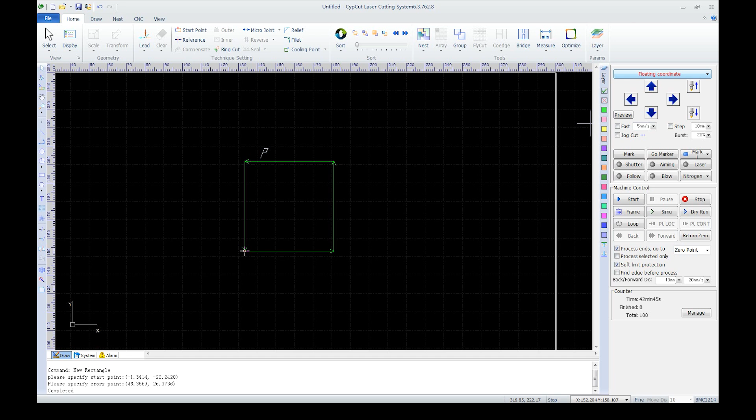Here is Friendess's CYPCUT tutorial. So far we've learned about features in view, geometry, technique setting, which enable us to quickly draw graphics and set basic techniques. Sort, group, fly cut, and co-edge help us to simplify cutting paths to be efficient. Today we're gonna learn a few more features of layers, task, and find edge, as well as how to use the machine control panel.

Let's start with the machine control panel. First of all, we need to figure out the difference between floating coordinate and workpiece coordinate. Machine coordinate is a fixed system. To facilitate flexible cutting tasks, CYPCUT applies floating coordinate and workpiece coordinate. Direction definition in different coordinate systems is the same. The only difference is 0-point position. The white box is the machine bed, and the red cross is the laser head.

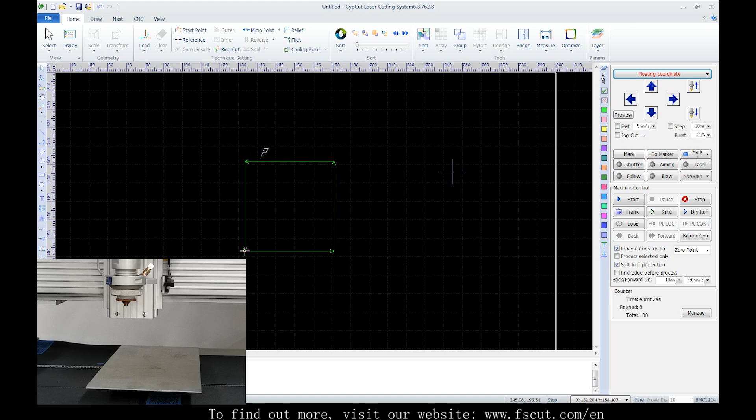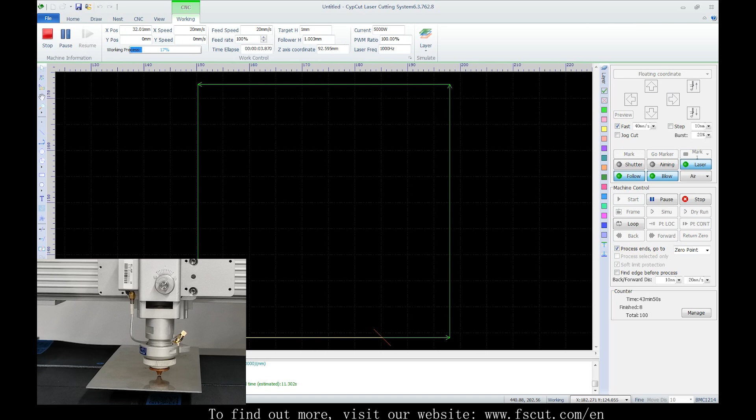On the floating coordinate, the laser starts cutting from where it stands. 0-point is the current position of the laser head. Take this position. We can start right from the point. And if we move to another position, it will start right from it. Floating coordinate is usually used in small batch cutting tasks.

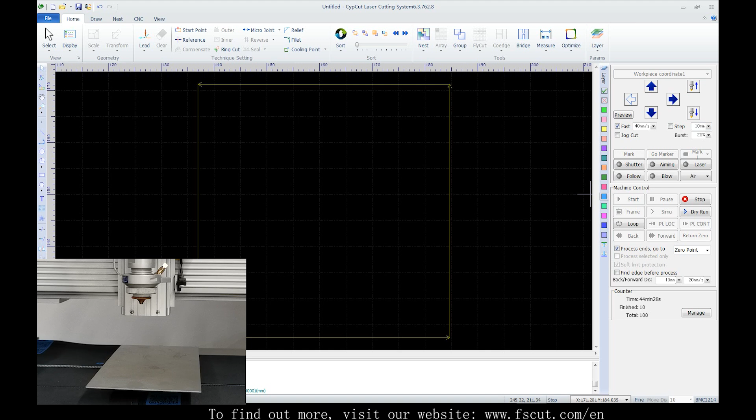Under workpiece coordinate, we've got a default 0-point with its position 0, 0. But 0-point is a user-defined position under workpiece coordinate. CYPCUT allows users to set 9 workpiece coordinates of different 0-points. During the process, if the cutting head was moved to another position, so long as it gets an instruction to start, it will return to the graphic next to the defined 0-point, and then start cutting.

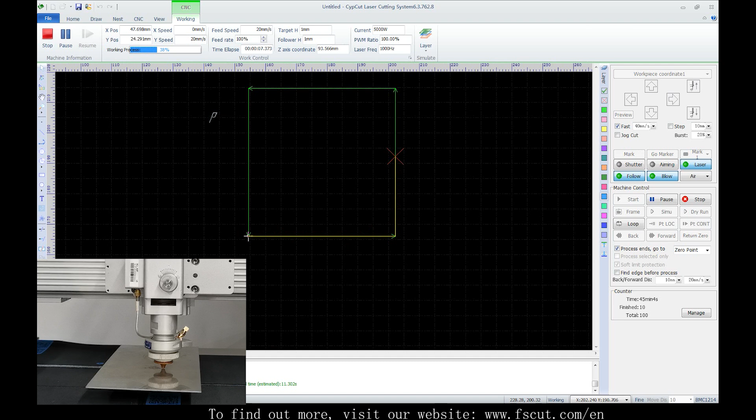This coordinate is used in mass production scenarios where a large quantity of plates of the same size are placed in the same position on the machine bed, which also requires a 0-point of fixed position.

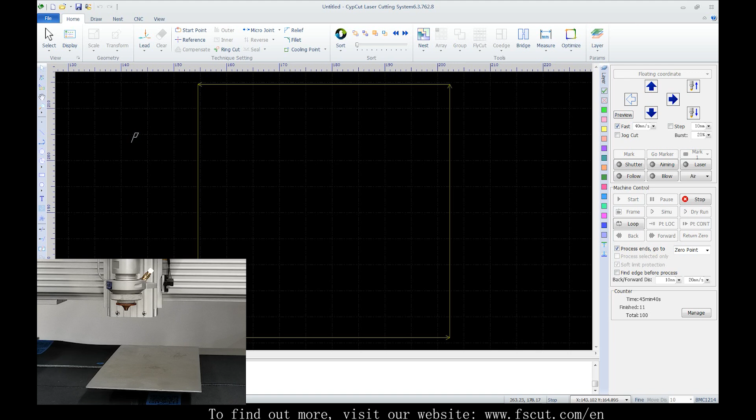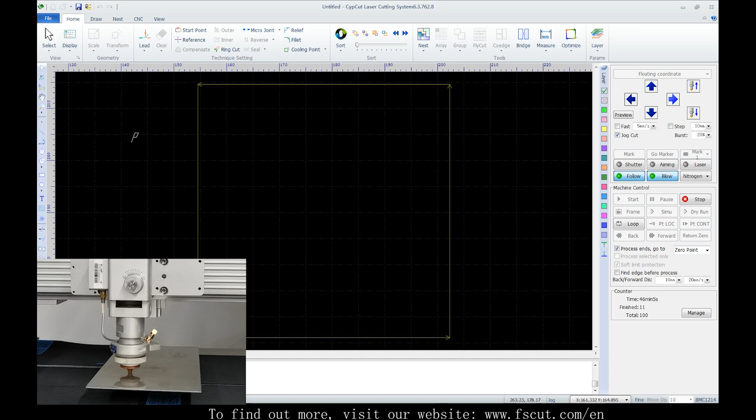Down below, with these buttons, we can jog along the X, Y, Z axis. We can change jog speed, and set a fixed jog distance. Jog cut is used to cut off plates. When selected, the cutting head will start to follow. Blow while jogging. And here, we can set the jogging parameter. Beside, this is burst power.

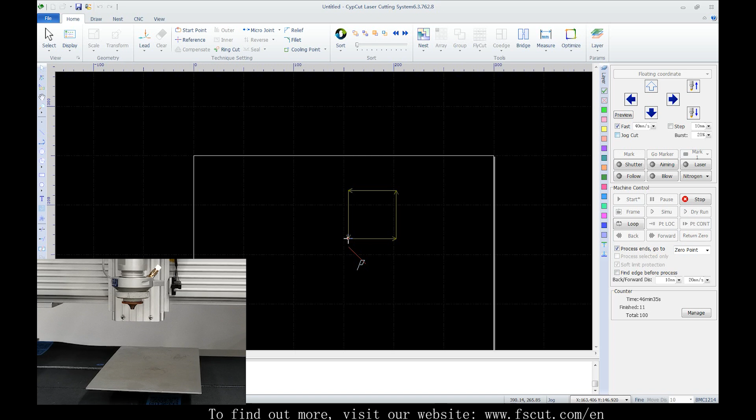Sometimes, according to need, we move the cutting head to a certain position. Mark is to mark the position with a little flag. And even if the head was moved away, by one click on Go Marker, we can go back to the position. We support 6 marks at most at the same time.

Under floating coordinate, sometimes we may lose the 0-point position because of misoperation, like we stop processing, move the head and directly start again. When that happens, in the drop-down menu of Marker, select Marked 0 and then Go Marker, and we can return to the 0 point of the last processing. The program will always keep the former 0 point.

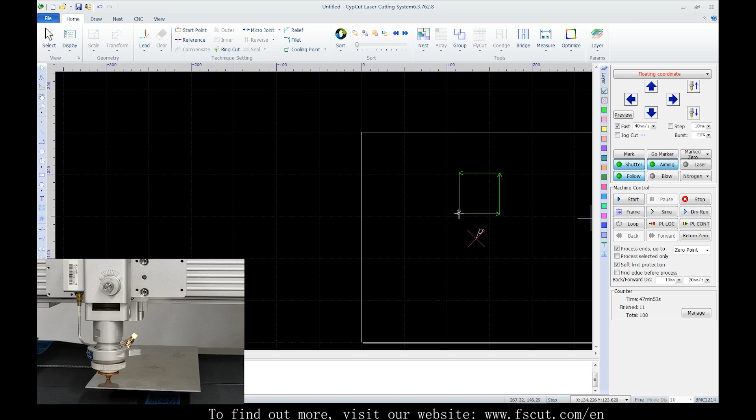And we've got Shutter. Select it to enable laser. Aiming, which is the guide laser, and click Laser to cut. Hit Follow. The cutting head will follow to the plate. In the machine control panel, we've got Start, which means to start to process. And we can also pause, resume and stop during the process.

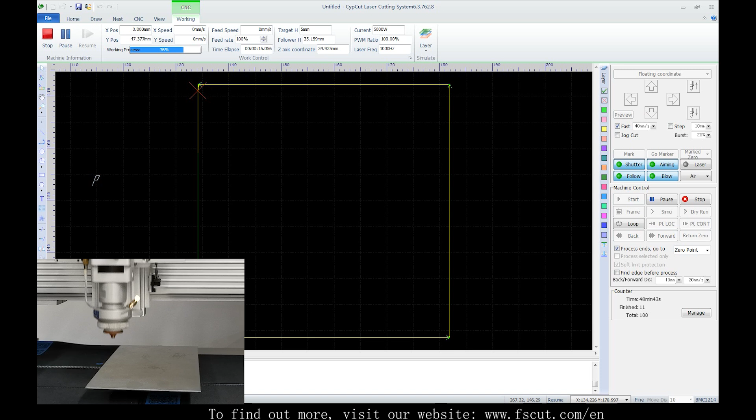And here, Fast Resume is to resume without piercing. Or we can go back or forward to adjust the resume position. Set the move distance right down here. When we stop processing without finishing it, and accidentally move away the cutting head, click Position Locate. With this button, we can get back to the breakpoint. Click Position Continue will directly resume from the breakpoint.

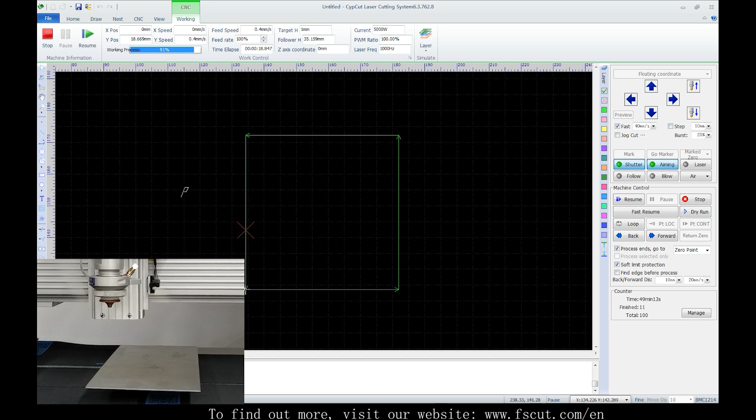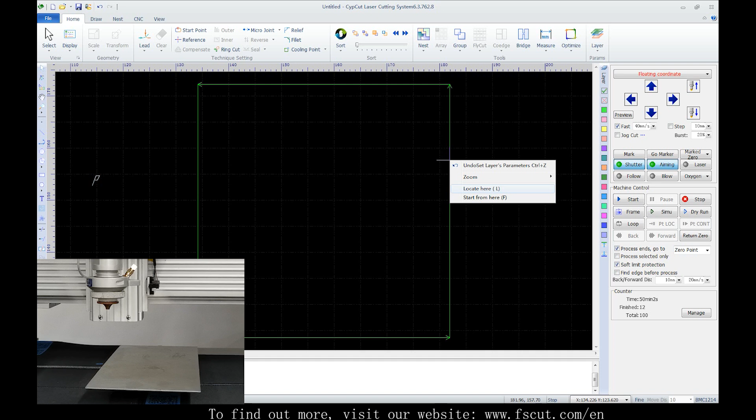We also support manually locating the breakpoint and resuming from it. After the processing is stopped, return to the 0 point. Make sure this step goes first or you will lose the 0 point position. And we can right-click on the graphic, and we will find Locate here and Start from here. Just do as we want.

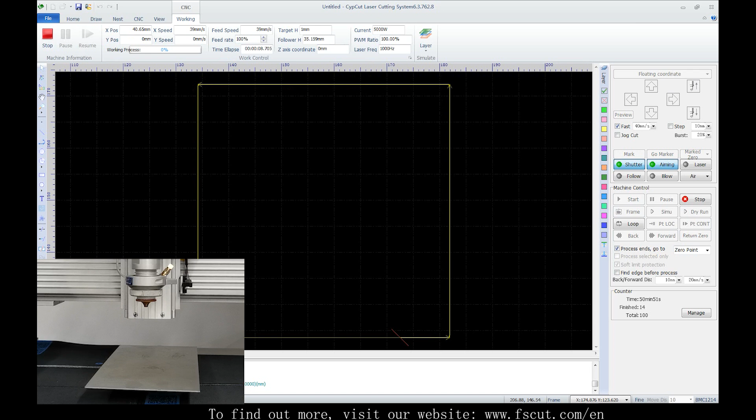Generally, we frame before processing to check the border of the cutting area. Click on Control Panel. The laser head will frame, that is dry run, the cutting zone on the machine bed in accordance with the drawing to be cut.

We can check the cutting path by this simulation. We can change simulation speed above in the menu bar. It only demonstrates sequence in drawing, doesn't execute any motion commands in the machine.

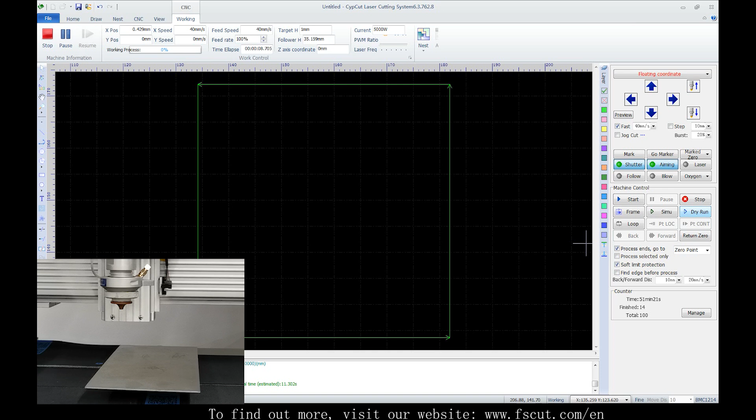Dry run is to travel along the designed tool path, not cutting it. Click Dry Run on Control Panel. Laser head will move along the tool path at preset cutting speed, while gas, laser, and PLC process are disabled.

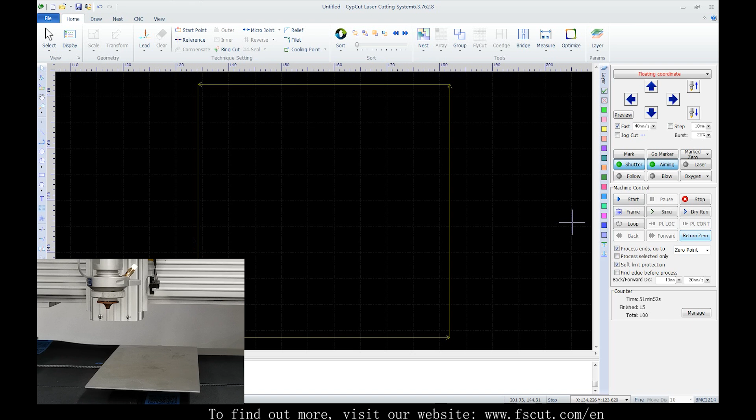Loop is for setting up the cycle times and interval between each cutting task. As for this return 0, once we frame under the floating coordinate, the 0 point will be fixed. If we moved the laser head away, we get back to this position by return 0.

Besides, we can go to 0 point and the like after process ends, or process selected graphics only.

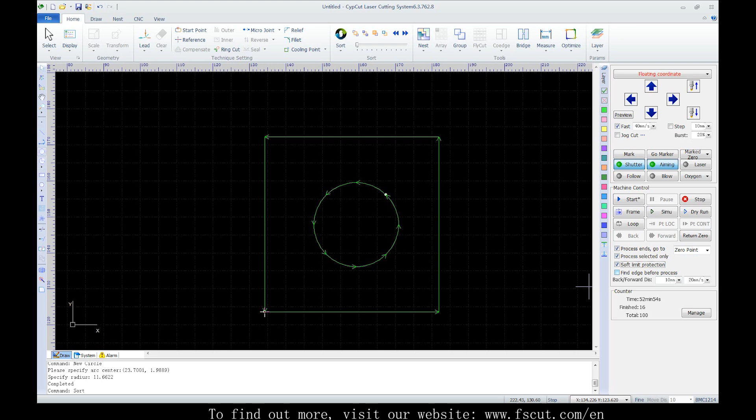We recommend selecting the soft limit protection so as to ensure that the laser head moves within the machine bed and avoid it getting crushed, and thus there would be risk if cancelled. Be careful. And here we have find edge before process.

Find edge is to locate workpiece edge precisely and find the workpiece 0. We can find it on the menu bar in the CNC module as well. When the plate is not uprightly lying on the machine bed, the machine can find the plate angle by targeting 3

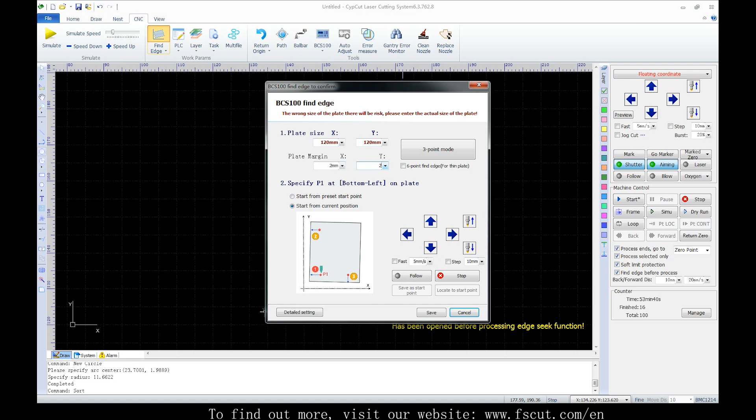or more points on the plate edge, then offset the cutting area with this angle. Click Find Edge to set the parameter. We input the real plate size and the plate margin we want, and choose where to start.

We can either start from the current position or from a preset start point. Click the button to start from the current position to find edge right away.

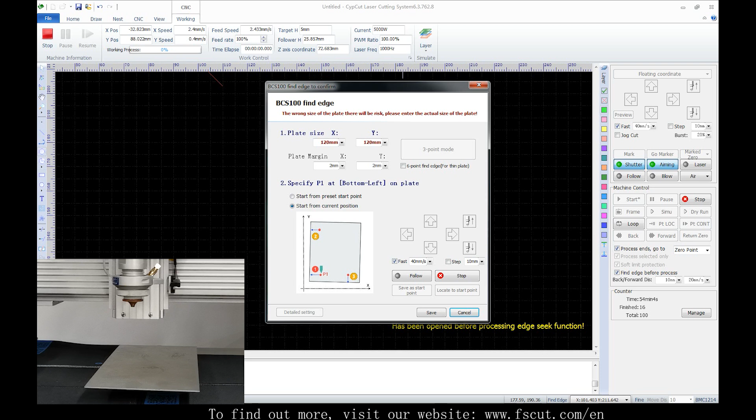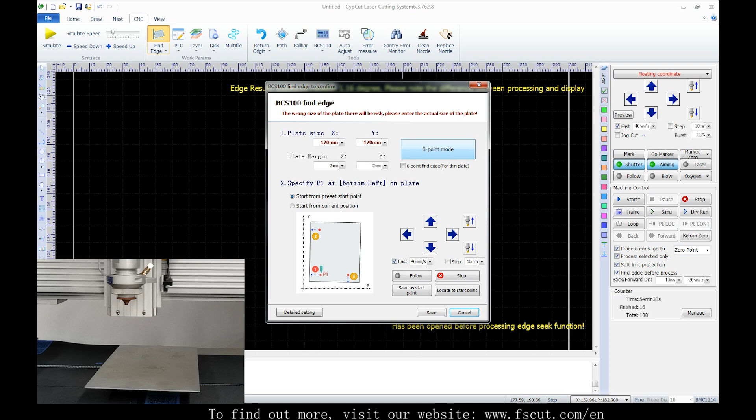For a preset point, we need to move the cutting head to the position first, then click to save the position as start point. And now, even if we move the head to another position, hit Find Edge button, it will start from the preset point.

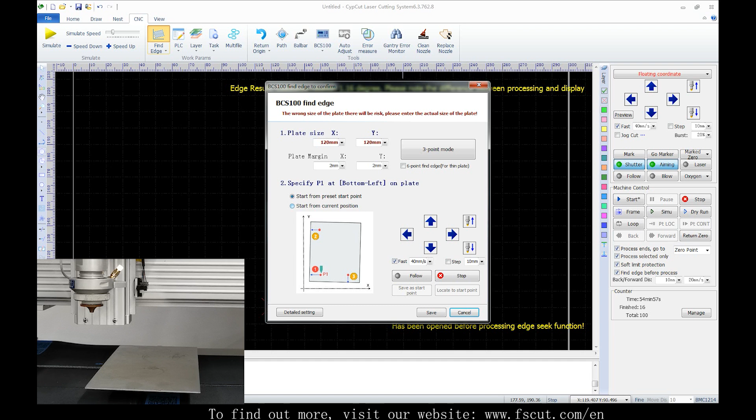Also, after the setup, select this Find Edge before process. The laser head will find edge before processing if we don't need to do it instantly. But no matter what, make sure there is plate right below for the head to follow, or the head may get damaged. When we cut sheet metal, we recommend 6-point find edge with higher accuracy.

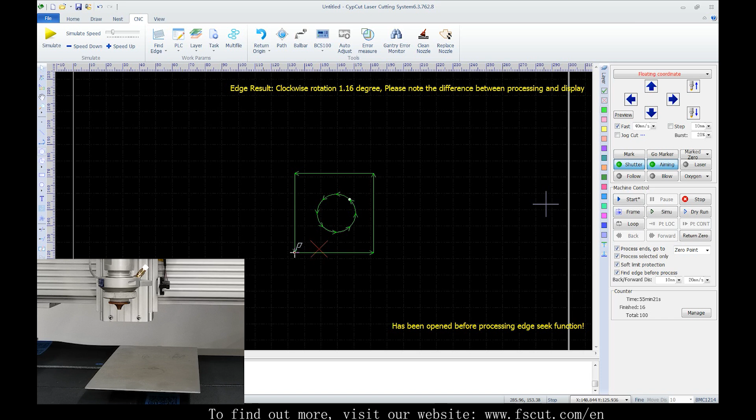Now, apart from those, we have 2 more features to go. First, let's see the task. When we have an urgent order and need to insert a cutting task, place the plate in a vacant position on the machine bed. Don't move the original one.

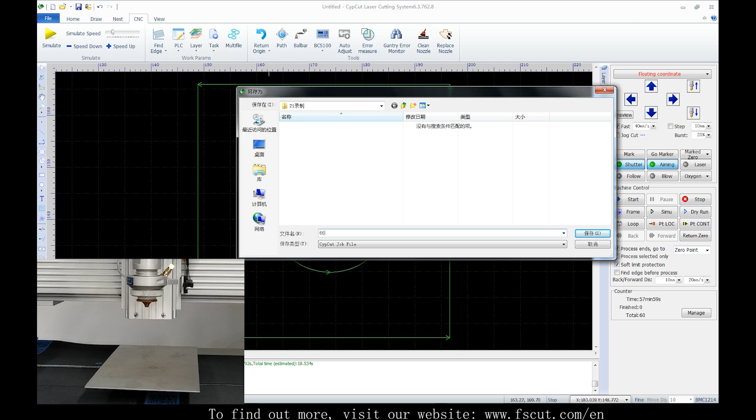We stop processing. In the drop-down menu, we save a task file, together with the drawing, breakpoint, find edge result of plate, and the program 0. Then we open the urgent one and get it processed.

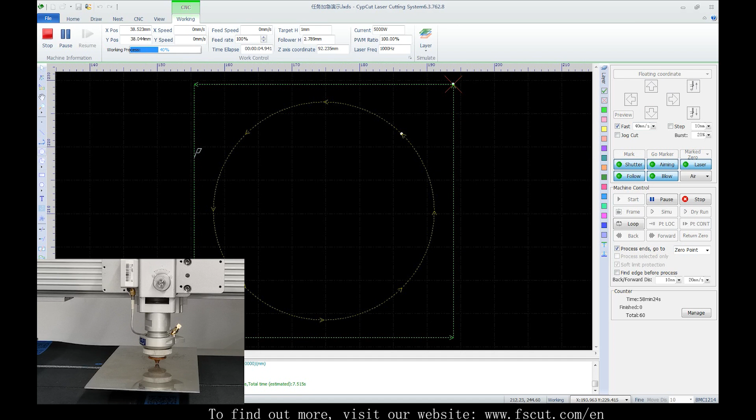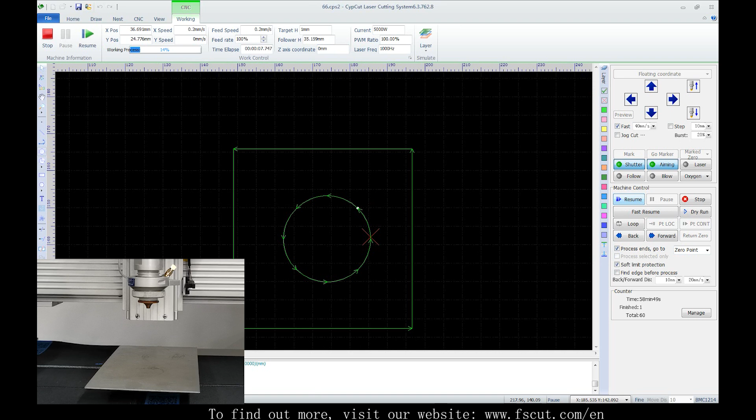Now, as we can tell, the cutting head has been moved to another position. After we finished this one, load in the task file we just saved and click Position Locate, and the cutting head will go back to where it just stopped, and the process can be continued.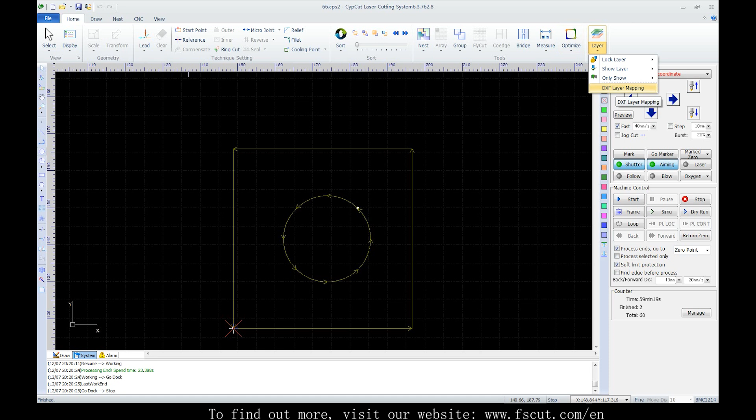The other is DXF layer mapping. In the drop-down menu of Layer, there is a DXF layer mapping. We already had graphics in different layers for cutting or marking when they were generated in the CAD. As it is imported into CYPCUT, we can appoint DXF layers into CYPCUT layers of cutting, marking, or layers that require different cutting techniques.

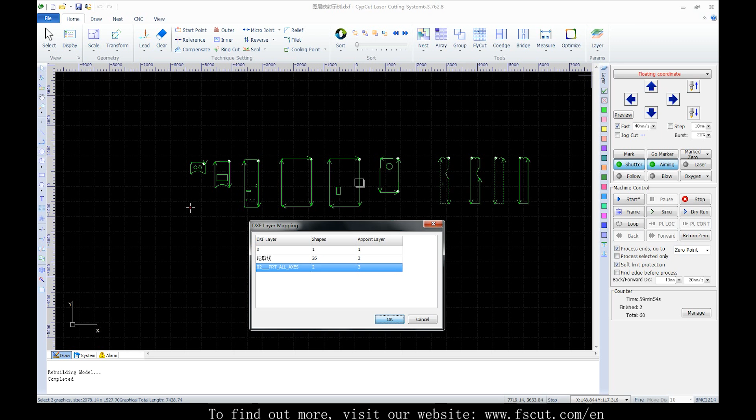Say we have this DXF format file with 3 layers. Appoint DXF layer to a CYPCUT layer. Click OK, apply to layers. This is how we do it.

On the right here, we've got this layer bar with 18 buttons. The parts geometry marked by the second one will not be cut, while the first one is used to reset the parts to get cut.

There are 16 layer options with 14 color buttons and the last 2 special options. With these layer buttons, parts geometry appointed by the last but one will be processed first.

It also works as a marking layer. Parts marked by the last button will be processed last.

Alright, these are for our CYPCUT laser cutting software tutorial. In the tutorial, we learned about main features of the software, including view module, geometry module, technique setting, sorting, every single one in the tool module, layer mapping, task, as well as the whole control panel features. All of them are utilized very often. Do improve your level of proficiency on them.